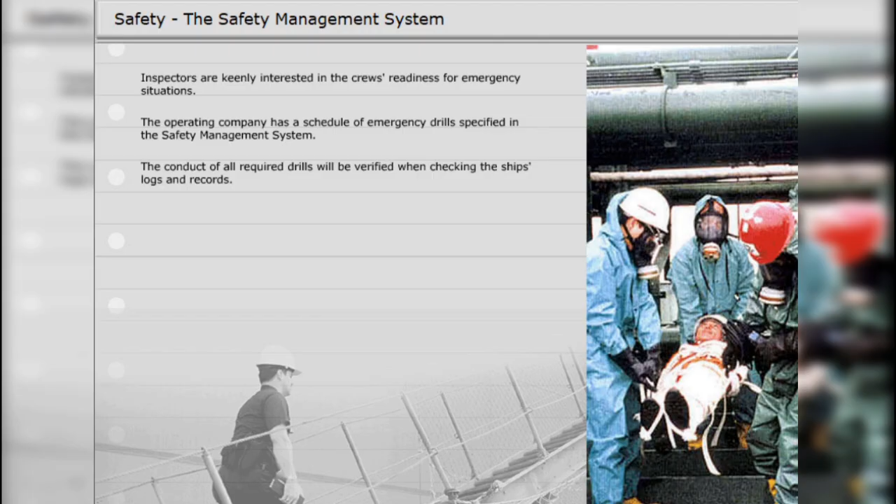All ships must implement a regular program of testing radio equipment like GMDSS, handheld VHF sets, and emergency radio beacons. Distress call procedures should be designated in writing, and the operator must have a GMDSS certificate. Handheld sets should have sealed lithium batteries marked for emergency use only and with the expiration date. The GMDSS officer should conduct daily testing and record the ship's position when making the test.

Battery rooms and chemical stores are hazardous locations where personal protective equipment should be available. In addition to safety data sheets, chemical storerooms should have rubber gloves, goggles, aprons, and portable eyewash units. Battery room doors should be marked with warnings, and the emergency batteries must regularly be tested and records maintained.

Inspectors look to ensure that safe practice is followed when metal drums and large pipe fittings are stowed on deck. Wooden dunnage should be placed beneath them to prevent movement and friction against metal surfaces. Chemical drums should not be allowed to rust into a dangerous condition. They should be marked clearly and an accurate inventory maintained, thereby allowing easy and positive identification.

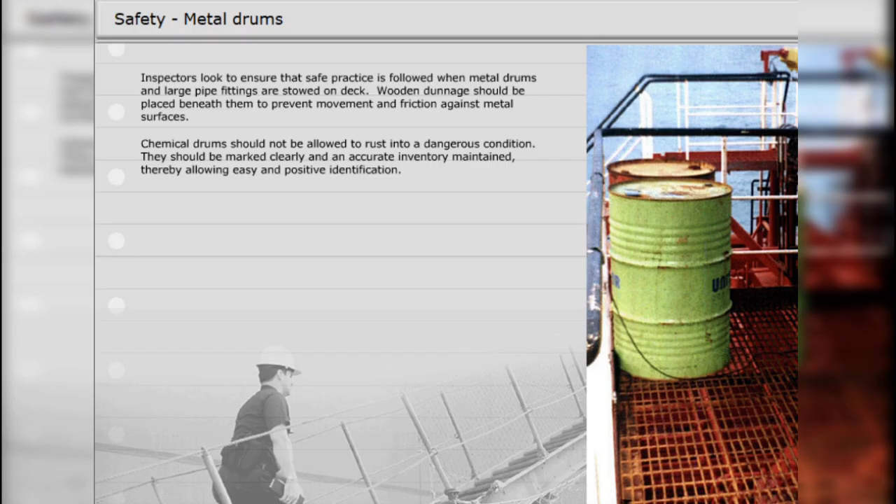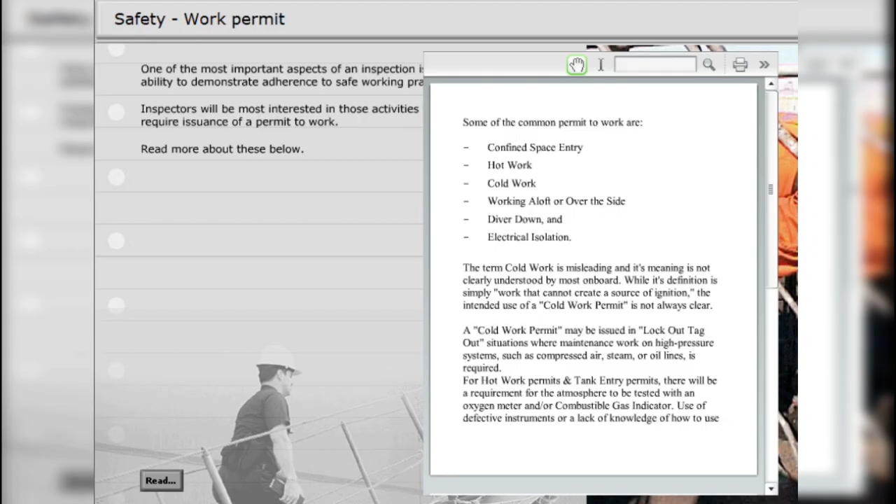One of the most important aspects of an inspection is the ability to demonstrate adherence to safe working practices. Inspectors will be most interested in those activities that require issuance of a permit to work. Read more about these below. Enclosed space entry permits are to be issued as required by company procedures and guidelines.

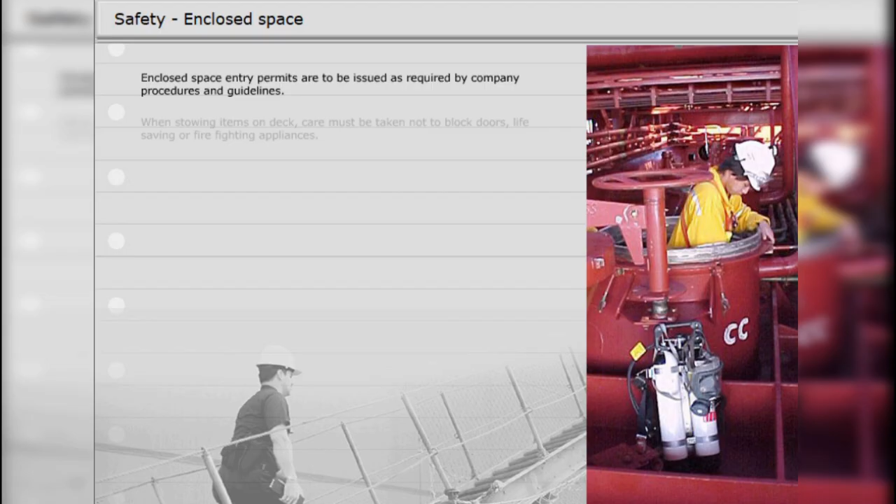When stowing items on deck, care must be taken not to block doors, life-saving or firefighting appliances. Interior fire doors must also be able to close completely. A maintenance schedule should be established to monitor the continuing efficiency of spring door closers. Watertight doors are generally tested using light.

Have the deck crew test lifebuoy lights as part of the ship's arrival routine, as they will be checked by both port state and vetting inspectors. Heaving lines should not be attached to lifebuoys with lights, and the release must work properly.

If an accident or near accident is recorded in the log and no formal report has been filed, a failure to report will normally be cited as a deficiency. The onboard medical log will be checked to ensure that all incidents requiring treatment are recorded.

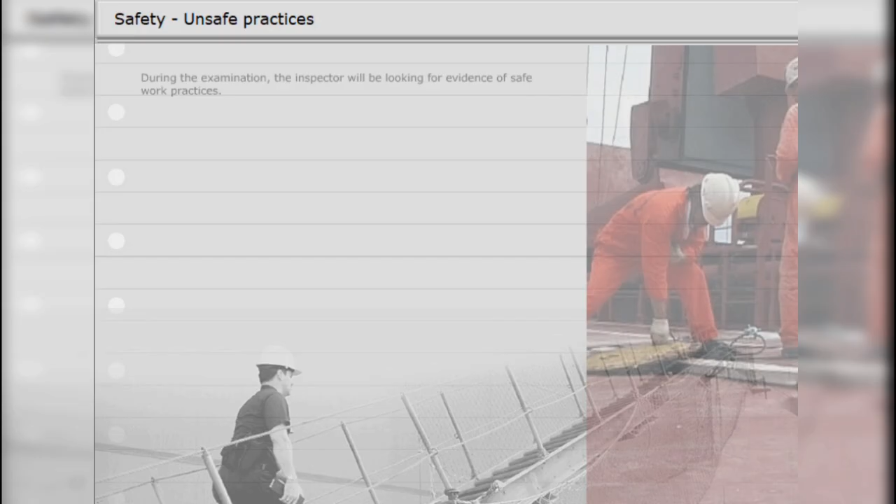During the examination, the inspector will be looking for evidence of safe work practices. Any open manhole or deck grating must be covered when left unattended, irrespective of reason or time duration. Any ladder in use must be tied off to prevent falls, and all personnel involved must use proper protection equipment.

Safety committee meetings should be conducted at regular intervals, with the inclusion of ratings from each department. Minutes of the meetings should be recorded together with hazards identification, corrective actions, responsibility and timeline. There should also be an onboard training plan comprising safety videos, computer-based training and course books.

A colour code scheme for deck and engine piping and valves is an established good practice. Cargo and fuel pipes must be hydrostatically tested to 1.5 times the maximum working pressure on an annual basis, and the date should be stenciled on the pipelines.

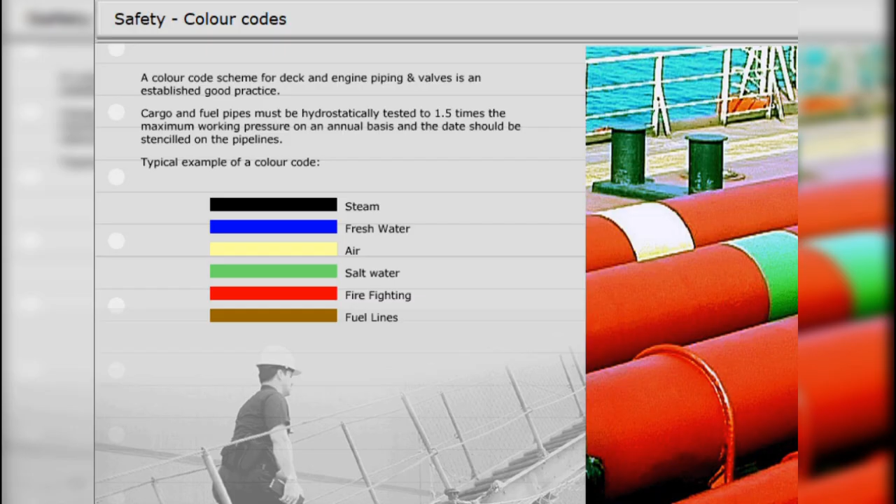Firefighting foam must be of the proper type for the service of the vessel. On chemical tankers, foam compounds must be effective on both polar solvent and hydrocarbon liquid fires. The inspectors will check that foam compounds are satisfactorily tested annually.

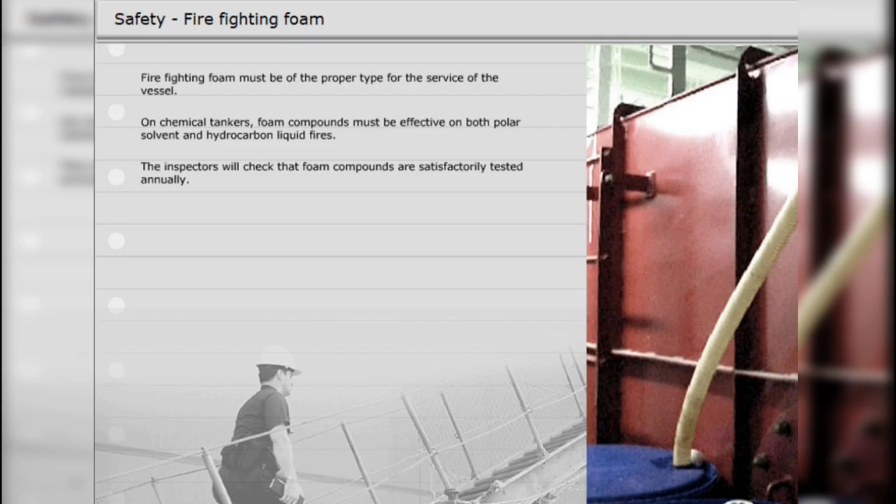A crew member must be assigned to challenge all visitors, and inspectors view the process as a reflection of due diligence. It may be helpful to post an additional signboard close to the gangway, requiring non-crew to report to the duty officer. Safety helmets and safety shoes are a must on deck. Ear defenders are a must when working in engine spaces.

The master's standing orders must be signed and acknowledged by the officers on watch. Likewise, the chief engineer's standing orders must be signed and acknowledged by duty engineers. Insulation mats should be placed at the foot of all electrical switchboards and at the base of the electrician's test bench. Starting and operating instructions should be posted for emergency steering gear, the emergency fire pump and the emergency generator. The instructions must be clear and readable.

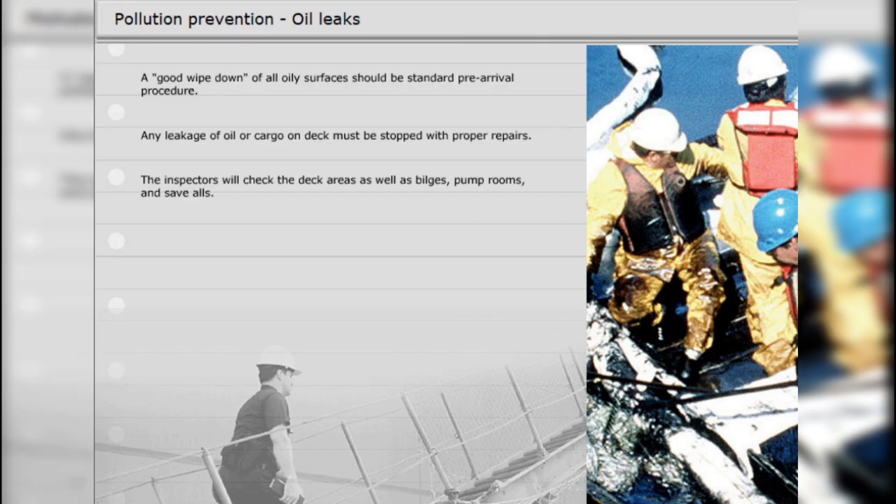Adequate drums, enough for 12 barrels of deck spillage, should be available for fighting small spills. As well as non-sparking shovels and brooms, sorbent materials and emulsifier for deck cleanup should be to hand.

Garbage management must be properly documented, where all disposals are recorded. Records must state any plastic incinerated on board and when landed ashore for disposal. Plastic ashes must not be thrown into the sea, but must be retained for shore disposal.

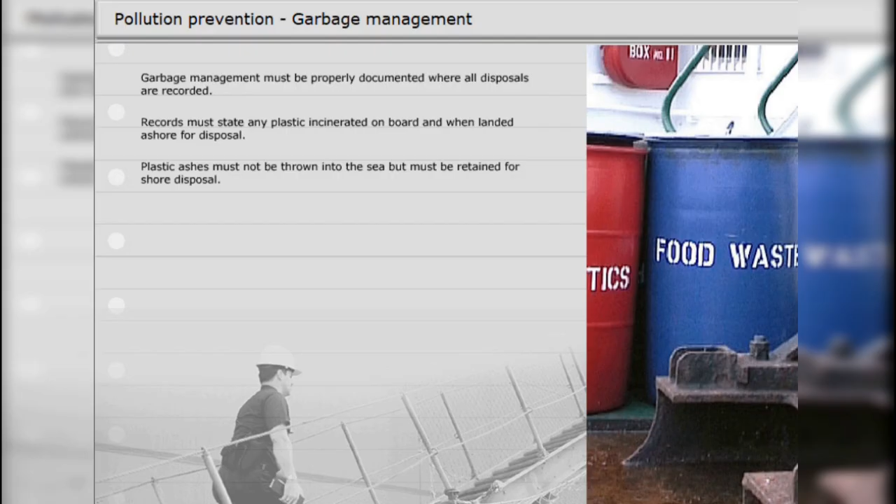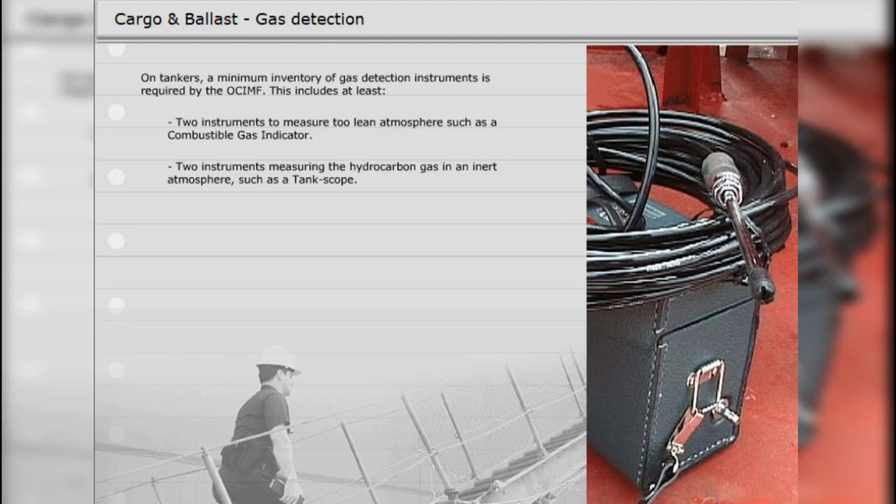On tankers, a minimum inventory of gas detection instruments is required by the OCIMF. This includes at least 2 instruments to measure a lean atmosphere, such as a combustible gas indicator, 2 instruments measuring the hydrocarbon gas in an inert atmosphere, such as a tank scope, 2 instruments capable of measuring oxygen content, such as an oxygen analyzer, and 1 instrument capable of measuring the presence of toxic gas in parts per million.

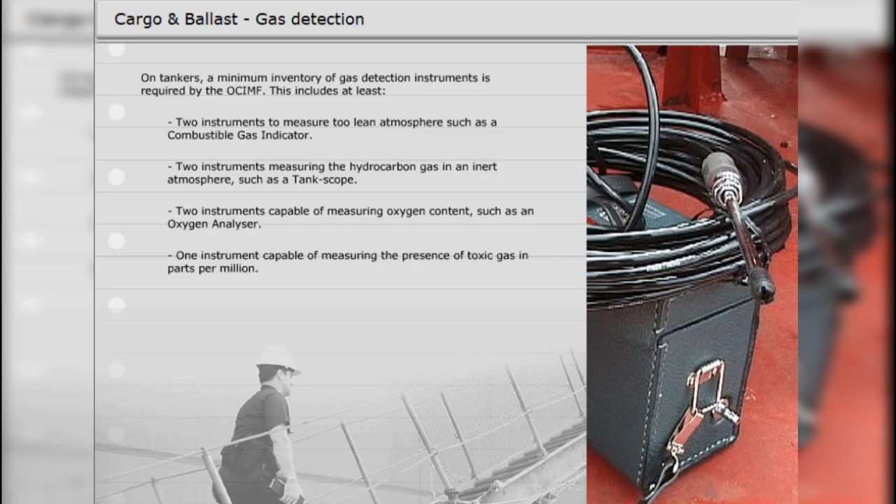These instruments consist of a hand pump and detector tubes, which are marked with a scale and change colour when toxic atmosphere is sampled. On oil tankers, tubes for benzene, hydrogen sulfide and hydrocarbons should be carried, as well as tubes for any other toxic cargoes routinely carried.

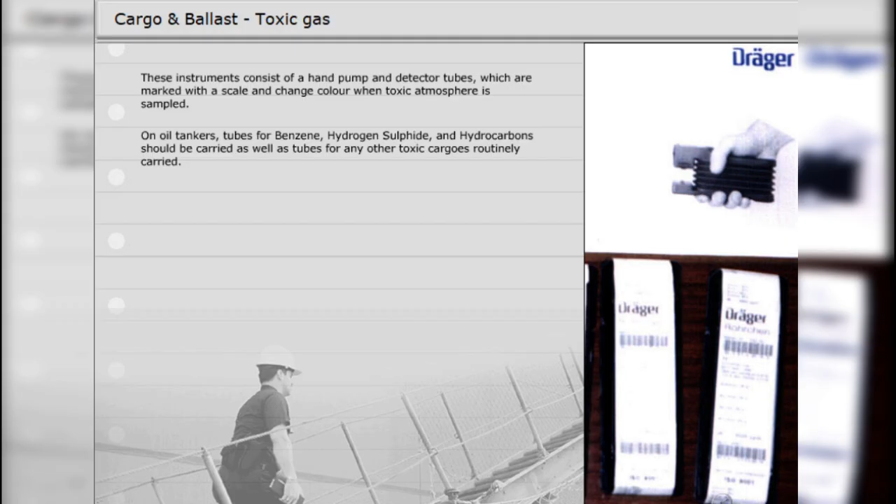A sufficient inventory of tubes should be maintained on board, and their shelf life, as marked on the box, must be monitored at regular intervals to ensure validity. Expired tubes may be used for training purposes, but must be clearly marked for training only.

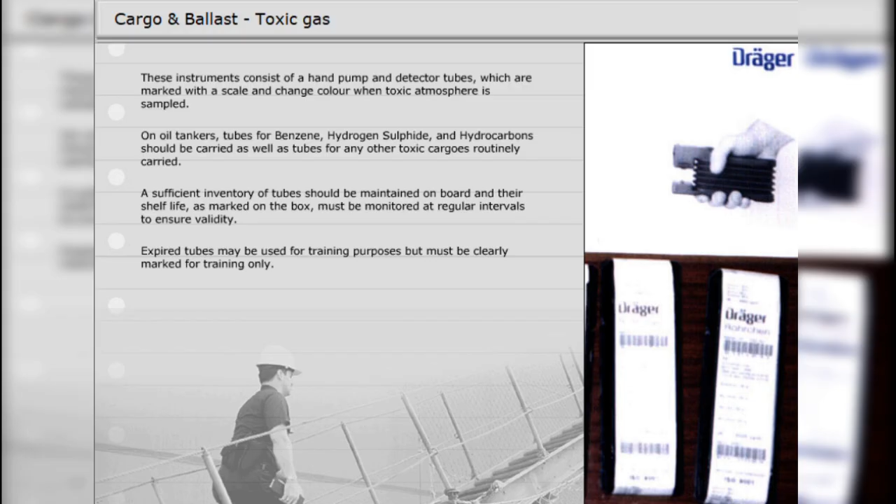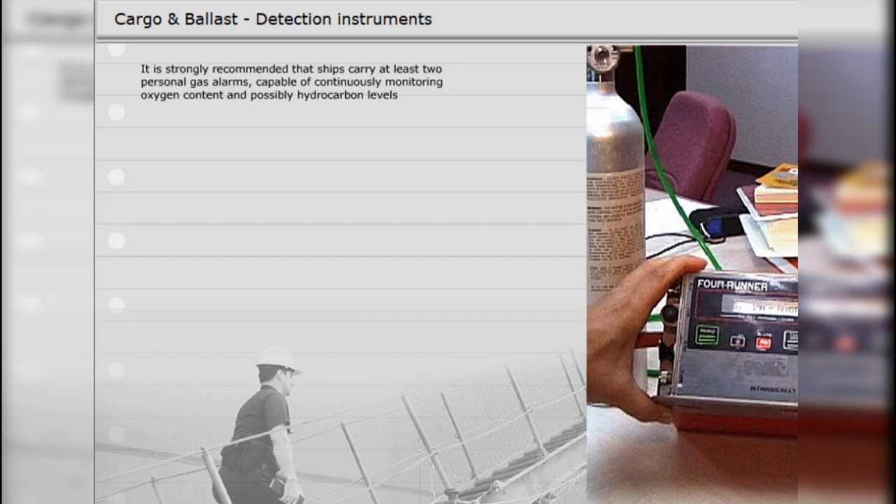It is strongly recommended that ships carry at least 2 personal gas alarms, capable of continuously monitoring oxygen content and possibly hydrocarbon levels. Inspectors like to see personal gas alarms used when personnel enter a confined space, such as the pump room. The company SMS manuals should clearly detail procedures for use of personal gas detection instruments. Proper maintenance is essential to proper operation. Read more about it here below.

On tankers, planned maintenance should ensure that pressure and vacuum valves are tested regularly. The ratings and test dates should be stenciled on the risers.

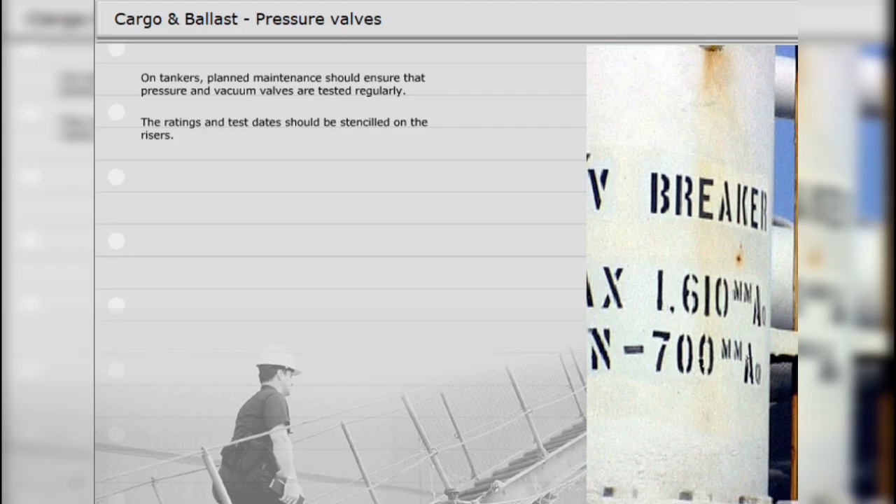On tankers, all entrances to the accommodation must be closed, except one designated entrance. The route from the gangway to the entrance door should be clearly marked. Ventilation and air conditioning have to be on recirculation during cargo operation. During transfer operations on tankers, all entrances to the accommodation must be closed, except one designated entrance. Regular monitoring of void spaces, including ballast tanks, for volatile gases must be recorded.

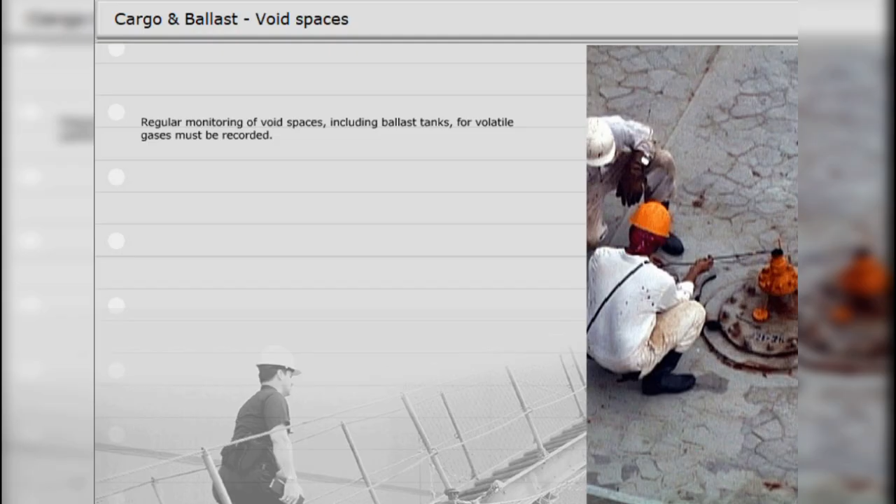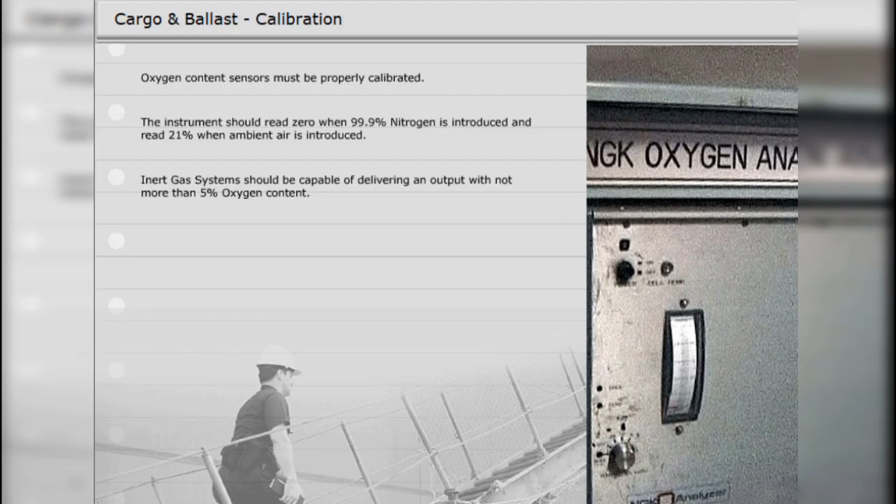Oxygen content sensors must be properly calibrated. The instrument should read 0 when 99.9% nitrogen is introduced and read 21% when ambient air is introduced. Inert gas systems should be capable of delivering an output with not more than 5% oxygen content. An approval certificate for cargo and stability computer should be on board.

Spring return valves on the sight glass on lube oil and similar tanks must never be tied in the open position. Likewise, self-closing cocks on sounding pipes must not be left in open position. Hydraulic header tanks for steering gear must be maintained in a topped-up condition, as should fuel tanks for the emergency generator and lifeboats.

The mooring winches should have the direction of rotation for payout marked on the flange. A winch brake test must have been conducted within the last 12 months, where the winch brake is confirmed to hold up to and slip at 60% of the maximum breaking strength of the mooring rope.

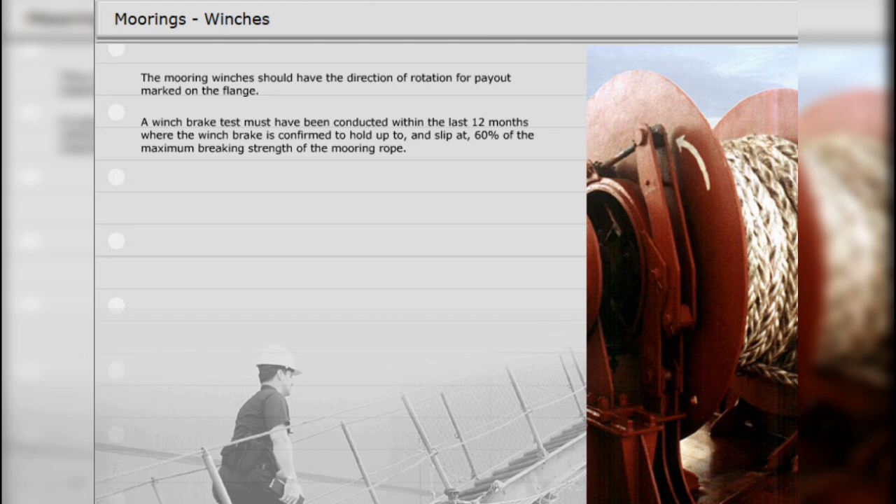The mooring lines must be without heavy chafing. Ropes in the same service should be of the same material and diameter. Mooring ropes should not be left turned up on drum ends. Ropes made of polypropylene must not be used due to their low melting point. Take care that ropes are wrapped onto drums in the proper direction. On the tension side of a split drum winch, ensure that only a single layer of turns is made, in order to avoid the line becoming buried in lower layers.

Rust is an eyesore for any inspector. The difference between acceptable levels of corrosion and too much rust is highly subjective, but looks do tell. An important indicator to an inspector is evidence of a good deck maintenance plan, with significant areas de-rusted and recoated.

If the ship is equipped with chemical suits, they should be properly stored and maintained. Failure to do that reflects badly on the ship and indicates that dangerous operations are handled haphazardly.

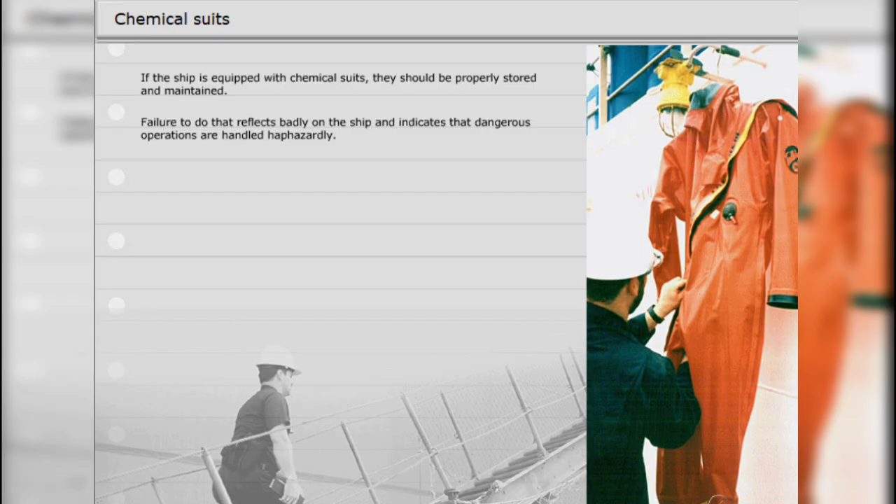In a clean, orderly condition, with adequate segregation. The sample locker must be stowed so that sample bottles do not move at sea. Due to the fire hazard, the locker should be fitted with a remotely released extinguishing system, or a fire extinguisher should be located close to the entrance door. The door should be marked "Keep closed, no smoking and flammable liquids."

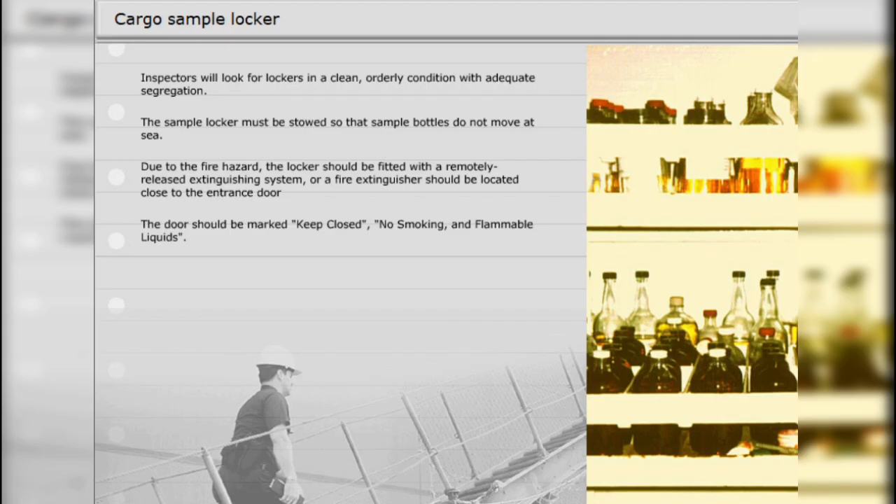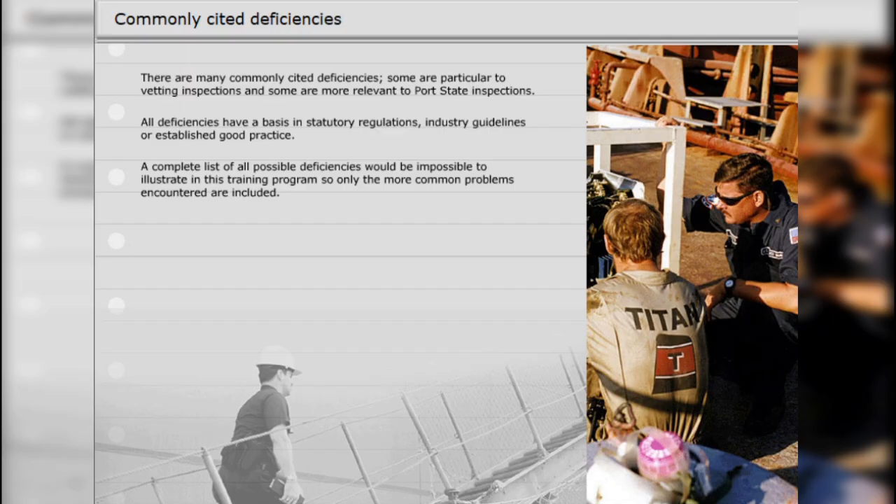There are many commonly cited deficiencies. Some are particular to vetting inspections and some are more relevant to port state inspections. All deficiencies have a basis in statutory regulations, industry guidelines, or established good practice. A complete list of all possible deficiencies would be impossible to illustrate in this training program, so only the more common problems encountered are included. The contents of this section are not considered exhaustive, but focus on statistically prominent items.

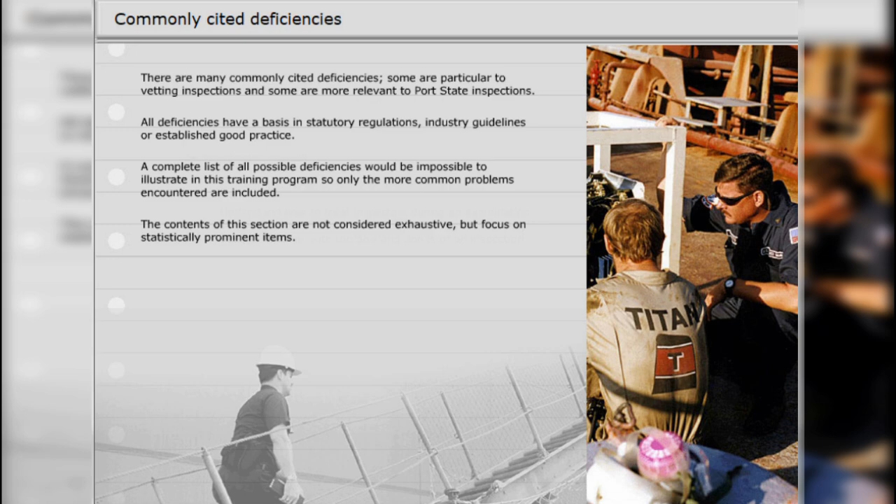With the do's and don'ts of an inspection. These are a few points that you should check before an inspection.

Safety is on the daily agenda. The crew is well trained in safety matters. The crew think safety first. Environmental protection policies are followed. The Protection and Environment Committee is motivated.

All participate in accident and near-accident analysis and corrective and preventive actions. Safety awareness programs are ongoing. All on board are familiar with vessels and fleet lost time injury rate and LTI objectives.

An updated questionnaire must be on board well in advance of the inspection. Each question must be checked one by one to ensure that it is understood as intended, and if complied with or not. Decide and follow up actions for the items to be corrected. Decide on the items not to be covered in line with the company standard.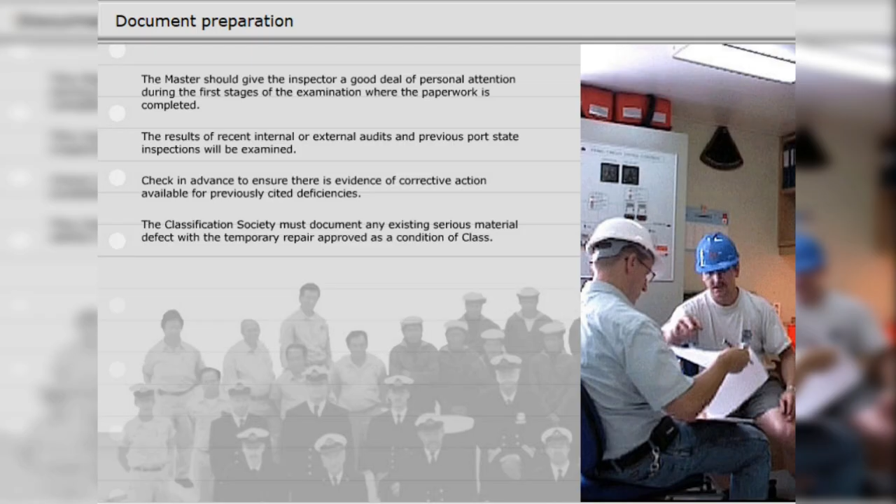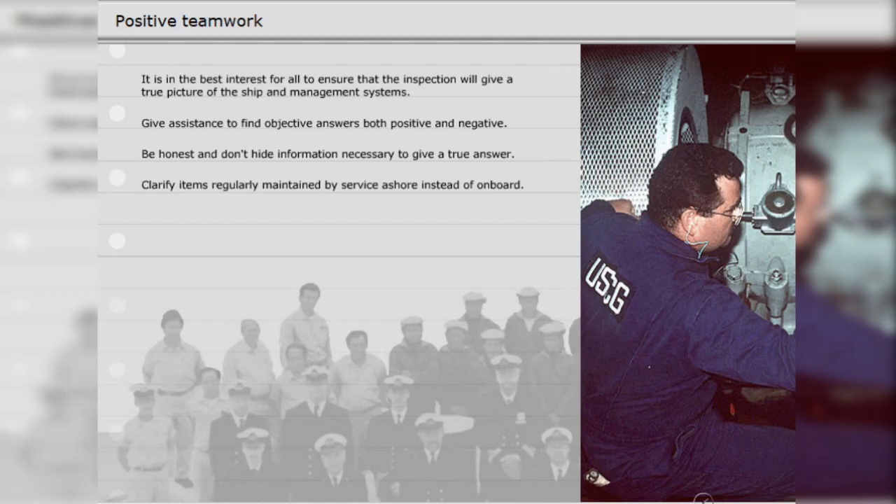It is in the best interest for all to ensure that the inspection will give a true picture of the ship and management systems. Give assistance to find objective answers, both positive and negative. Be honest, and don't hide information necessary to give a true answer. Clarify items regularly maintained by service ashore instead of on board.

Best practices may not necessarily work for all management systems. Management may have implemented other standards that cover items inspected. Delays and misunderstandings may be avoided when the potential charterer carries out final evaluation of vessel.

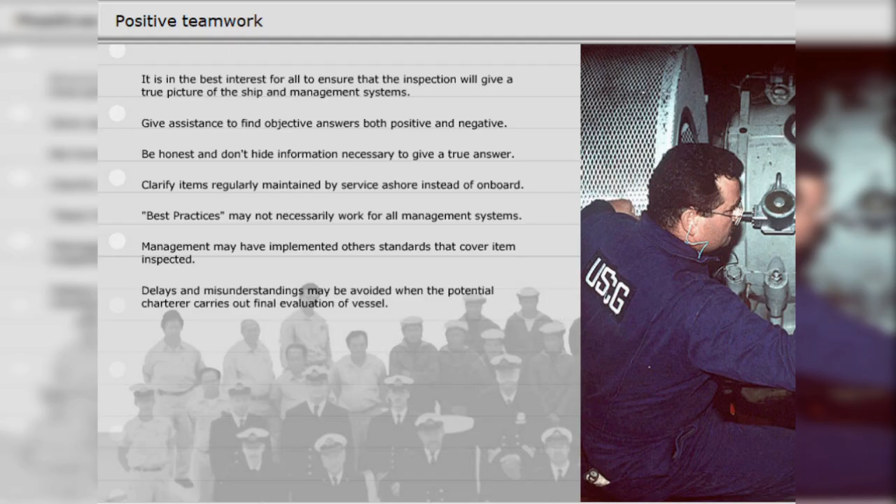Even the condition of the public toilets can create an impression. A missing toilet seat is a substandard condition. If aboard, the company safety superintendent should introduce himself and indicate his desire to accompany the inspector in his tour. It should be evident that the crew takes pride in the ship and that morale on board is a high priority.

The use of multiple shapes, sizes and styles of binders, file folders and logs should be avoided. Evidence of systematic filing goes a long way in projecting professionalism and organisation, and its value should not be underestimated.

The most important safety practice is the use of personal protection equipment in areas where required. It means that all personnel transiting the cargo deck must wear safety helmets and safety shoes. This includes engineering personnel who may be called forward. Deck officers should lead by example and enforce personal protection requirements.

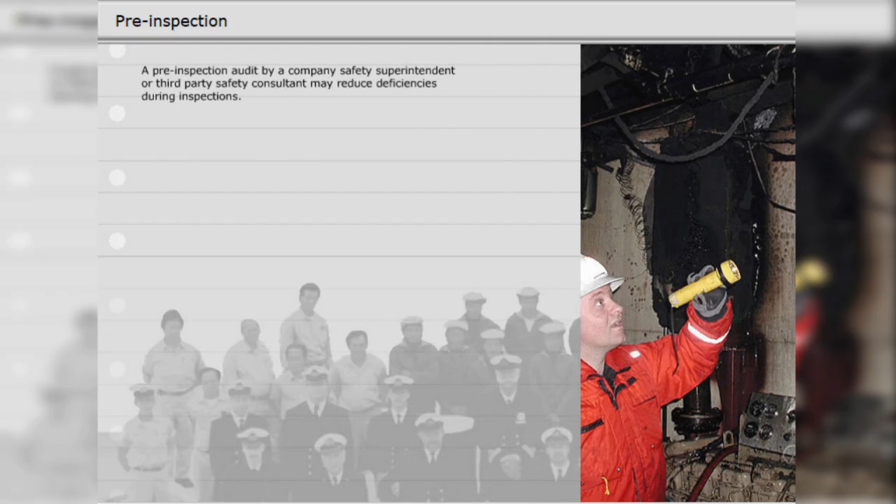A pre-inspection audit by a company safety superintendent or third-party safety consultant may reduce deficiencies during inspections. Such measures help in advance of a commercially important inspection. Regular internal company audits also assist in maintaining focus on safety and operational performance. However, the critical item is the attitude of the management and crew, which should ensure that the standards are maintained at all times, and not just prior to an inspection. Read more about it below.

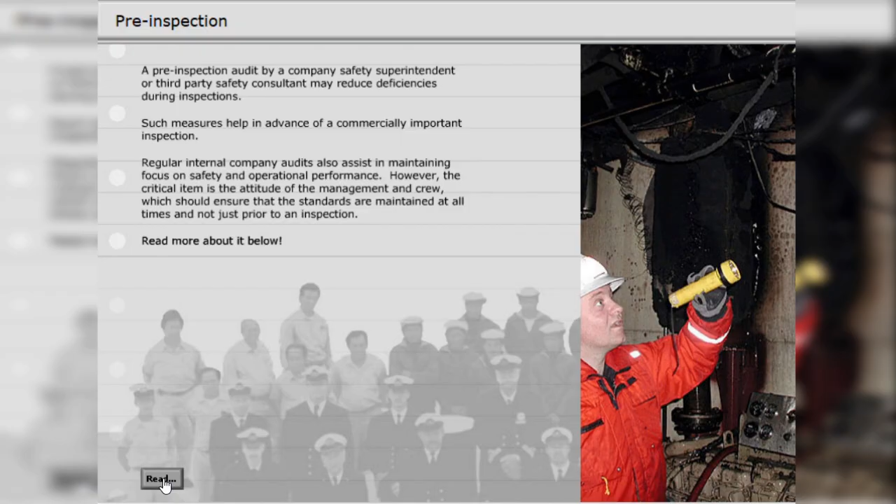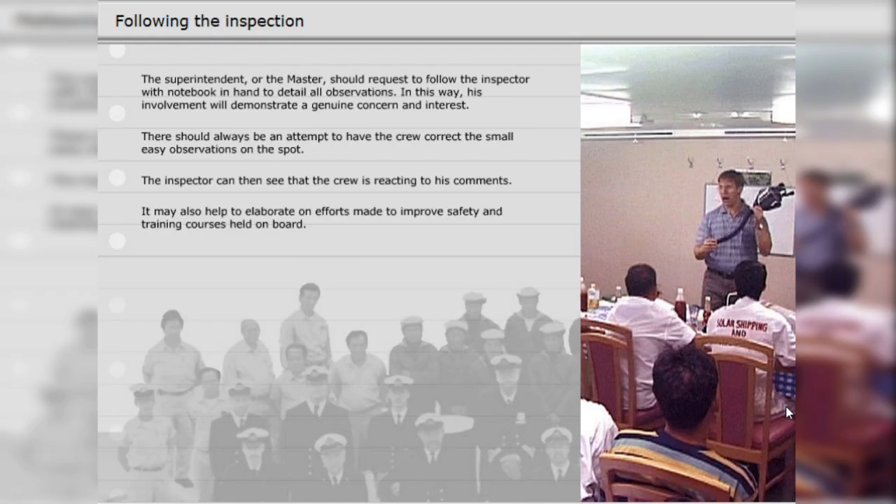The superintendent or the master should request to follow the inspector with notebook in hand to detail all observations. In this way, his involvement will demonstrate a genuine concern and interest. There should always be an attempt to have the crew correct the small, easy observations on the spot. The inspector can then see that the crew is reacting to his comments. It may also help to elaborate on efforts made to improve safety and training courses held on board. Specific do's and don'ts should be discussed with the crew in advance.

Adherence to posted warnings should be a standard procedure, but all too often the daily routine on board becomes lax and attitudes careless. These phenomena must not be allowed to exist. The only acceptable procedure is to adhere to posted warnings and established safe practice. A cargo pump room is exposed to gas hazard. The inspector expects the crew members to respect safety measures. Read more about these below.